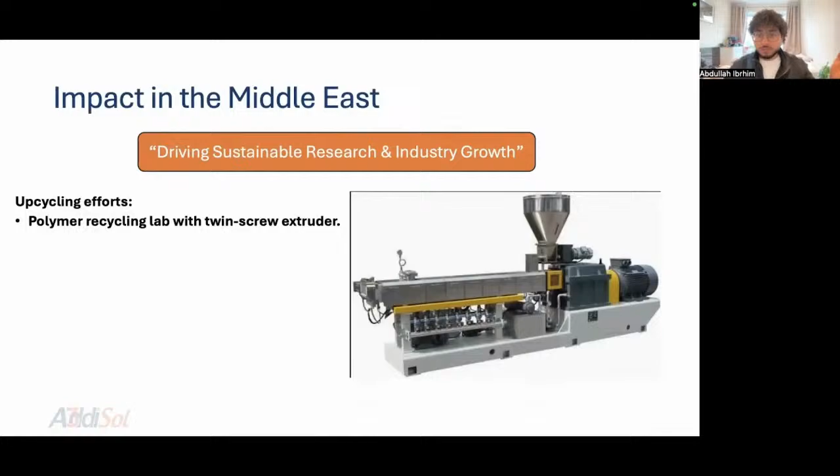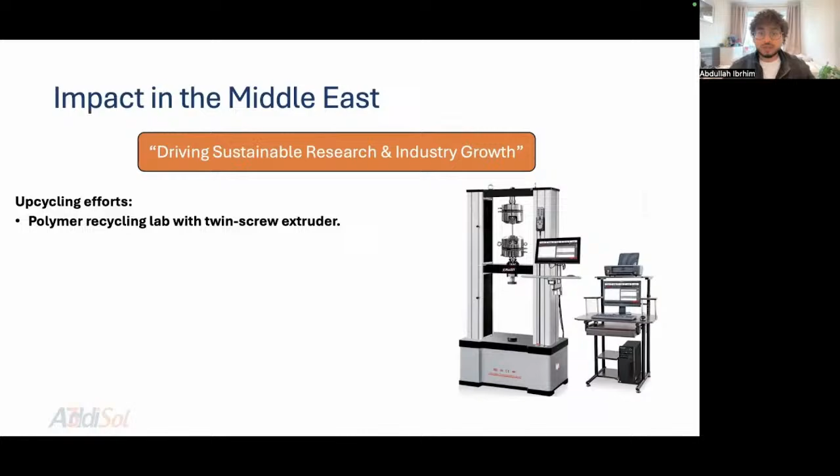This includes providing twin screw extruders that can mix multiple recycled polymers and then convert them into pellets, filament makers that can convert these pellets into usable FDM filament, and also rheological material testing machines that can determine the printability of these recycled filaments. At the same time, we also provide powder atomizers that allow a similar recyclability for metals.

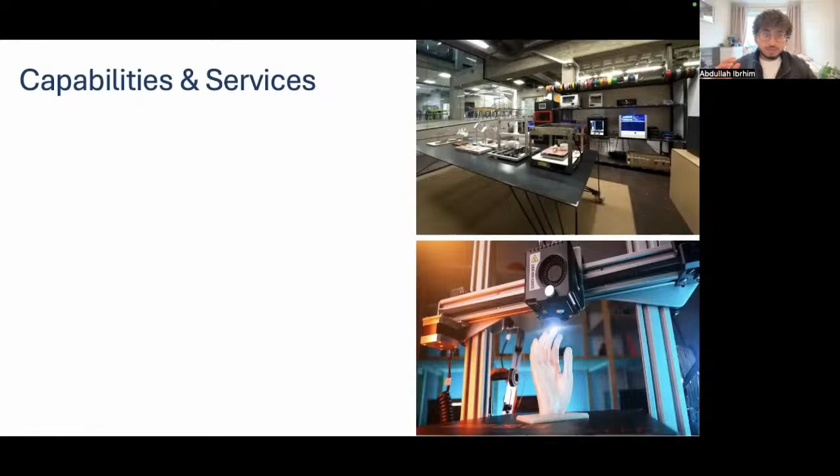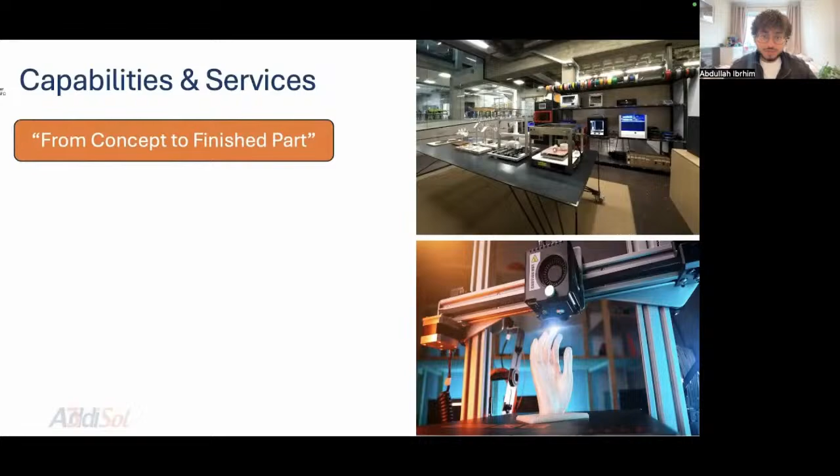So, the capabilities and services available at AddiSol. Our goal has always been to assist our clients from concept all the way to the finished part. Our core capabilities include 3D printing solutions such as SLM, binder jetting, polymer extrusion, composites, CFC technology, as well as direct energy deposition. Material testing equipment such as universal testing machines, dynamic mechanic analyzers, hardness testers, fatigue testing machines, all the works. We also provide geotechnical testing machines like triaxial, consolidation, and soil mechanic equipment.

As I mentioned before, we also offer contract services such as on-demand 3D printing, whether small or large-scale assemblies, as well as finishing, mechanical testing for client projects. Basically, our team of design engineers is proficient in reverse engineering parts for metal 3D printing, as well as designing bespoke solutions for our clients. We cover the full workflow, from design and simulation to printing, post-processing, including finishing and painting, all the way to quality testing to ensure that parts are ready for critical applications.

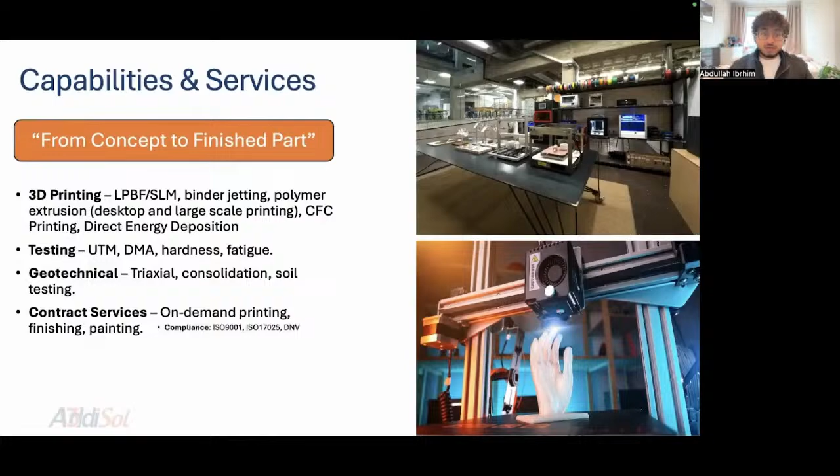Finally, we also help our clients adhere to compliance certifications. For example, recently we helped one service center get a DNV certification. Now, as I mentioned before, we are expert in turnkey solutions and handling complex projects. We take pride in turning ideas into tangible products.

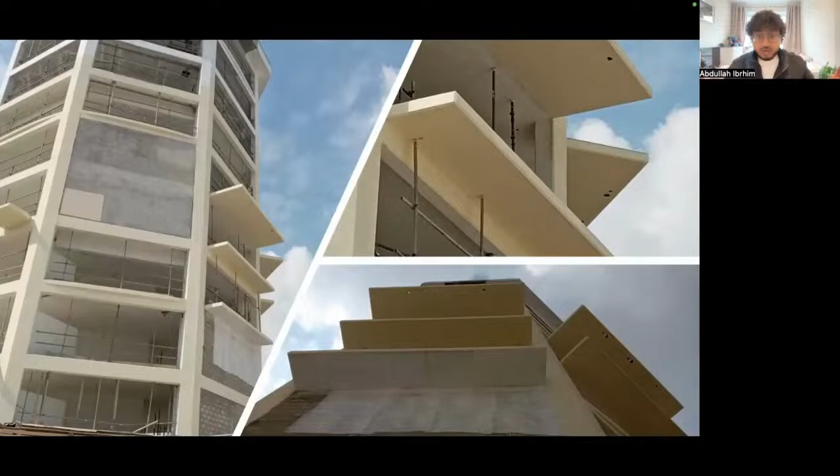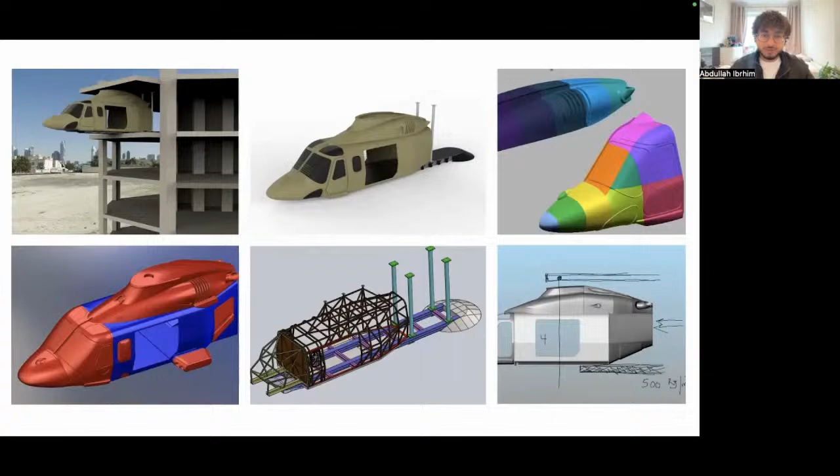And thus, after designing, began the printing process. Using our largest 3D printer from Sweden, we began printing the nose as well as the body of the helicopter.

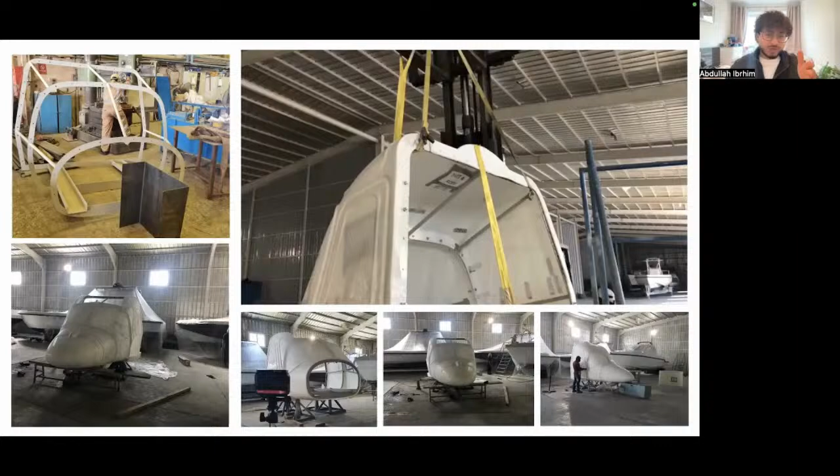And then here, you can see the fabricated support structure or the frame, all of which was fabricated in our facilities in Qatar by our own team of engineers. Zero outsourcing. And this video is also going to give you an idea of the size of this project and showcase how our team dealt with the difficult task of managing so heavy an assembly.

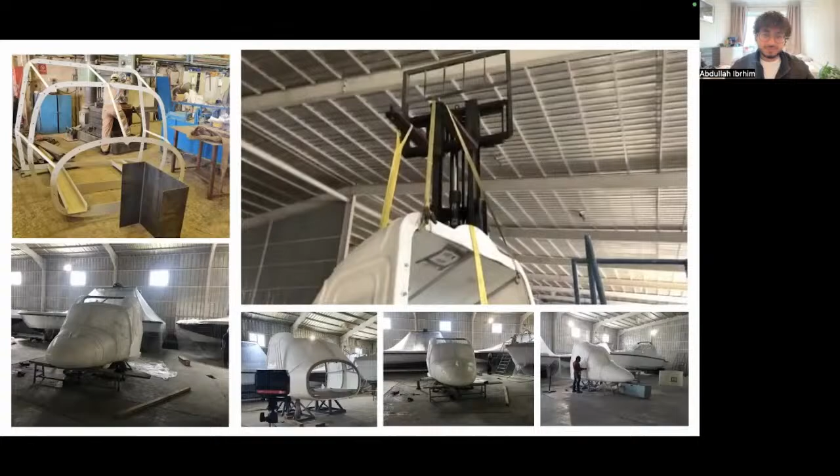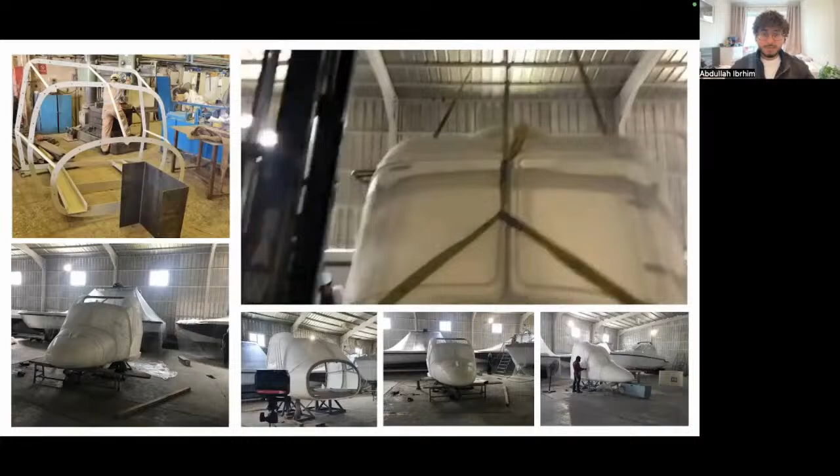And the frame was also assembled with a safety hatch integrated into it. You can also see the initial phases of painting and finishing in this video.

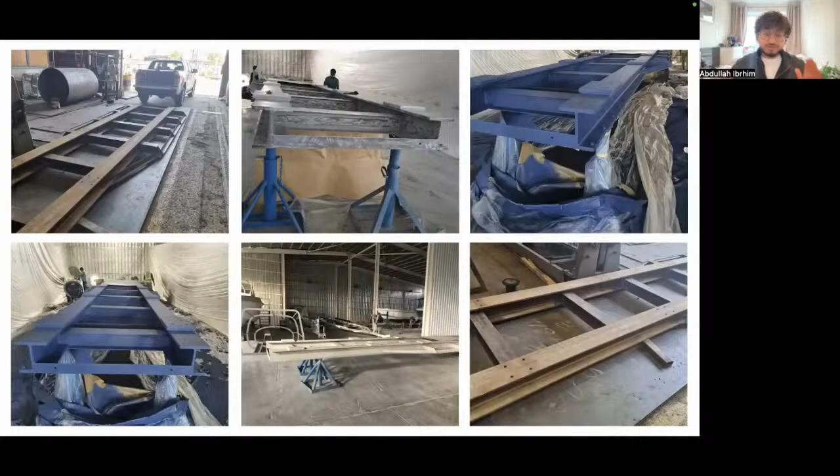And then this is the beam structure that would have held the entire assembly and frame together with the concrete slab. Again, fabricated in our facility by our own engineers. Some more finishing, specifically of the backside of the helicopter's body, where the engine exhaust can also be seen.

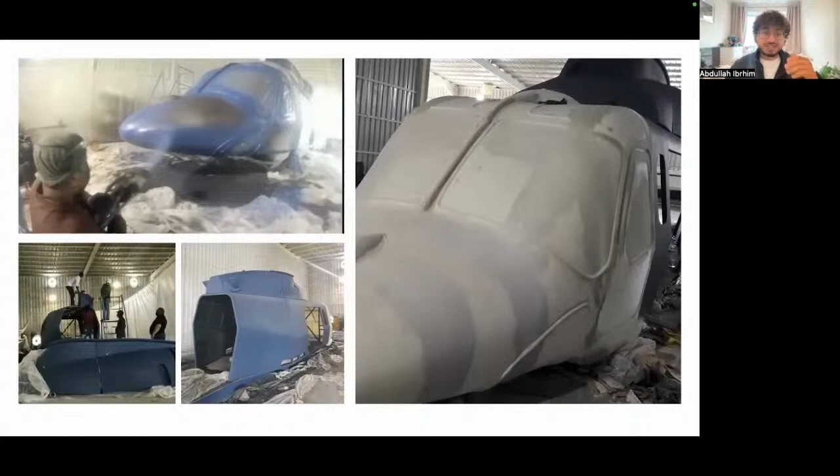And bit by bit, you can see the assembly coming together. This is the front side, the nose of the helicopter. And thus began the installation process.

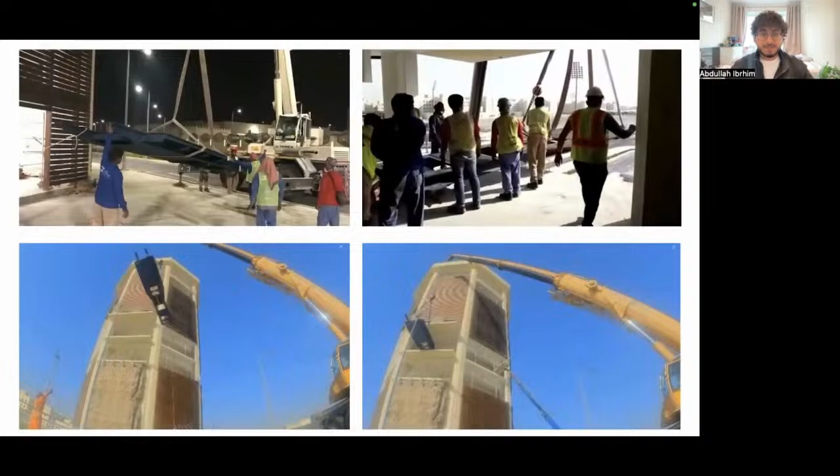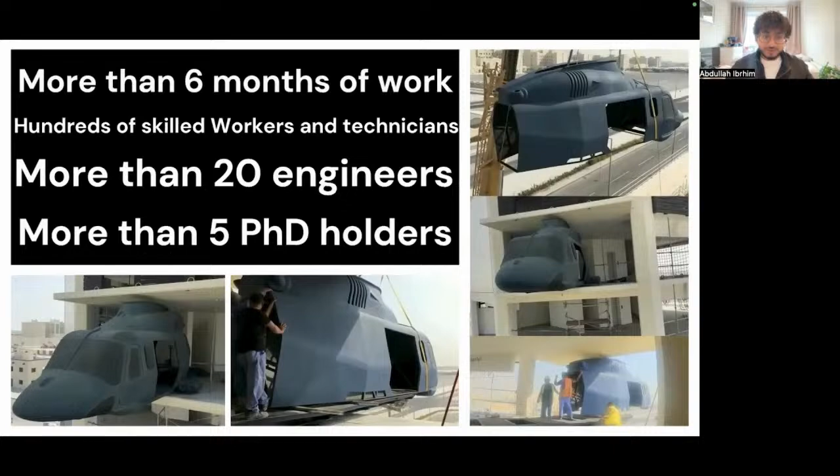This project was a task and a half, but after 6 months with a team of around 20 engineers, 5 PhD holders, and hundreds of skilled workers and technicians, all of them a part of Addisol's teams, we were able to deliver the final result. And this is just one of our most recent ventures in the Middle East.

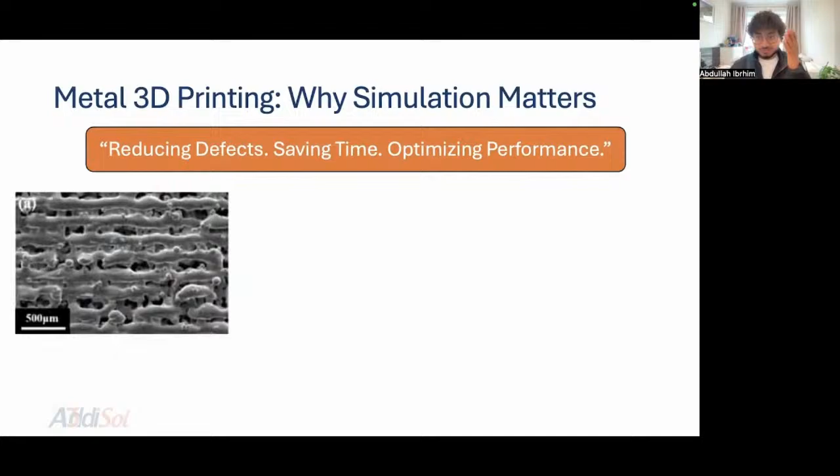When it comes to defects, the 3D printing process of metals is a process riddled with them. The process involves complex physical phenomena occurring across multiple time and length scales. The types of defects include porosity, which can create weak spots and eventually cause cracks. And then these cracks are also closely related to residual stresses and incomplete fusion.

Another common type of defect is the balling phenomenon, where liquid metal solidifies into spheres under the action of surface tension, and this eventually leads to a negative impact on the powder quality of the next layer. These are just some of the process defects that the metal AM process involves.

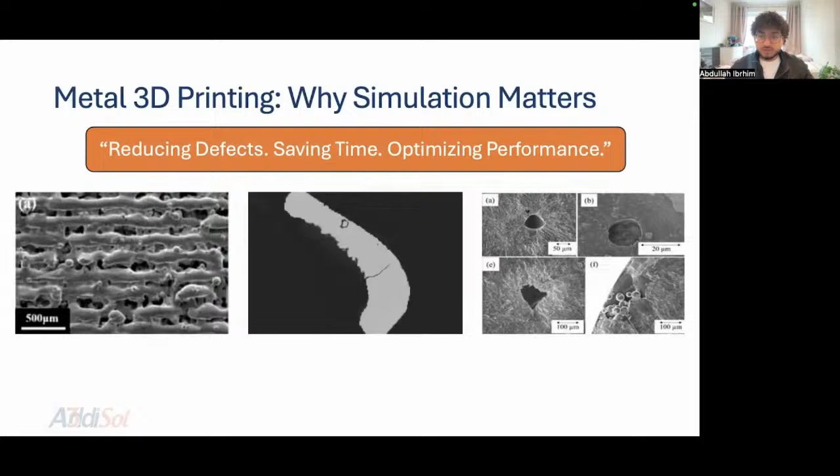Avoiding such catastrophic defects, though, is essential for team leaders, especially when it comes to the ideology of first time right. Every hour on the machine and every kilo of powder is cash, pure cash. Simulation lets us test ideas on a screen first, so we avoid failed builds and we accelerate approvals.

The outcome that we are after is simple: first time right, more often, and a faster path from concept to qualified part. This stands out even more when we consider a process like metal AM, where raw material and process costs can build up rapidly. Repeated work is a liability and it can absolutely ruin workflows.

Now, what do team leaders care about? So, how do we de-risk new parts and materials? How do we shorten time to market? And how do we standardize process knowledge across teams? These are the questions that we hear the most often from R&D, production teams, and quality assurance teams.

The right simulation approach tackles all three of these: de-risking, speed, and institutionalization of the best practice. And the answer to all these questions lies in selecting the right simulation tool.

Typically, metal AM simulation models work at multiple scales: the micro, the meso, and the macro. For the macro scale simulation, the FEM approach has been widely used by many models. At the meso scale, CFD, SPH, and lattice-Boltzmann methods are used to analyze fluid flow in the melt pool. And at the micro scale, phase field and Monte Carlo models are used to analyze grains, nucleation, and voids.

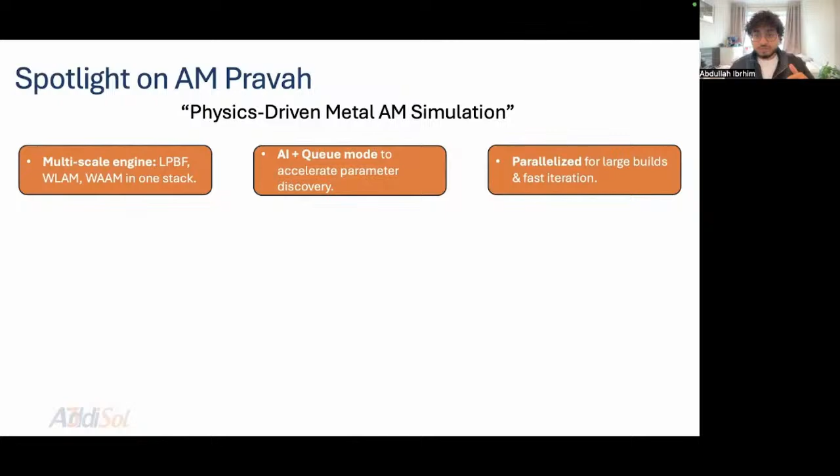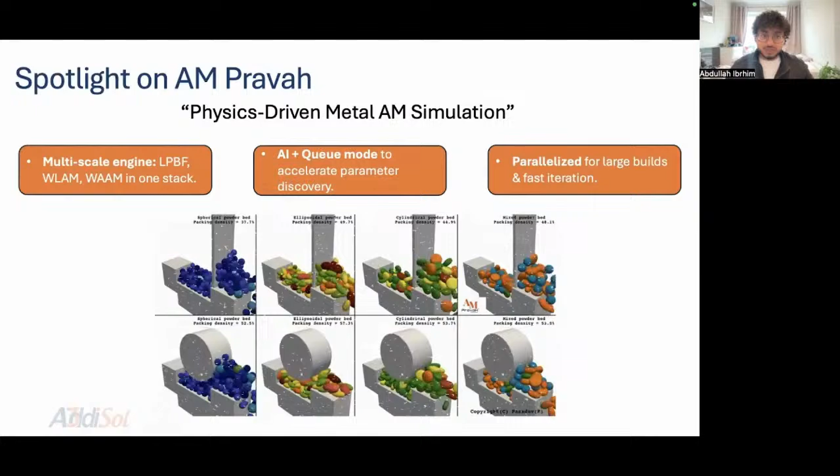So, just summarizing, what is AM PravaH? And what does it do? AM PravaH covers the processes that most teams run: LPBF, along with wire-based DED.

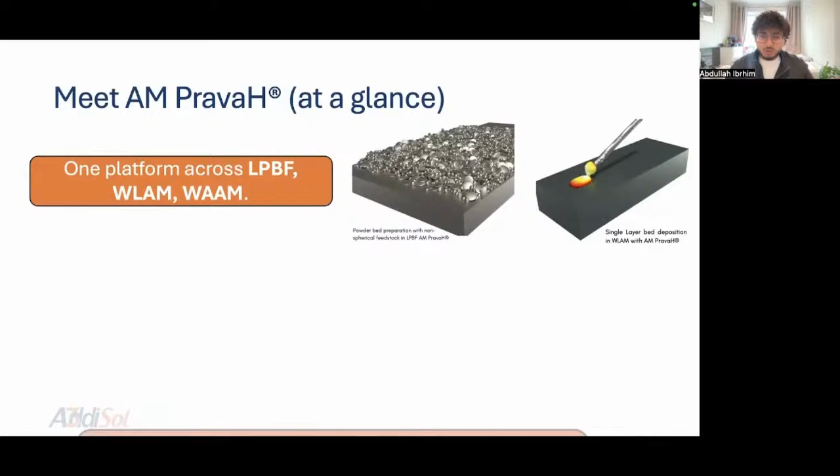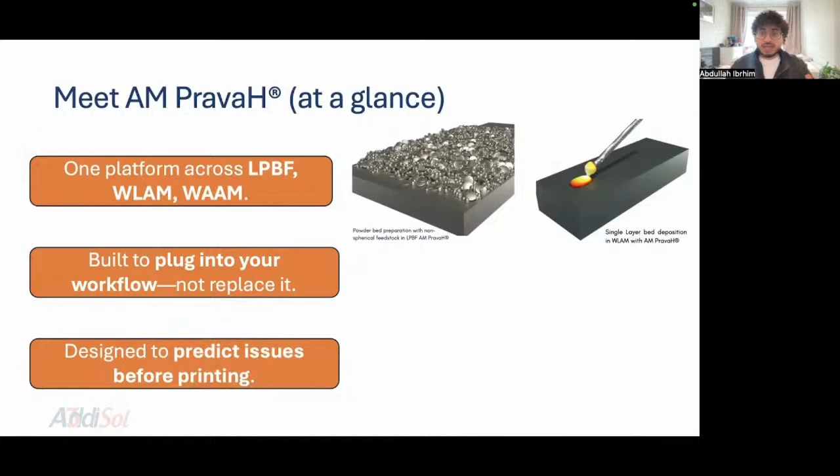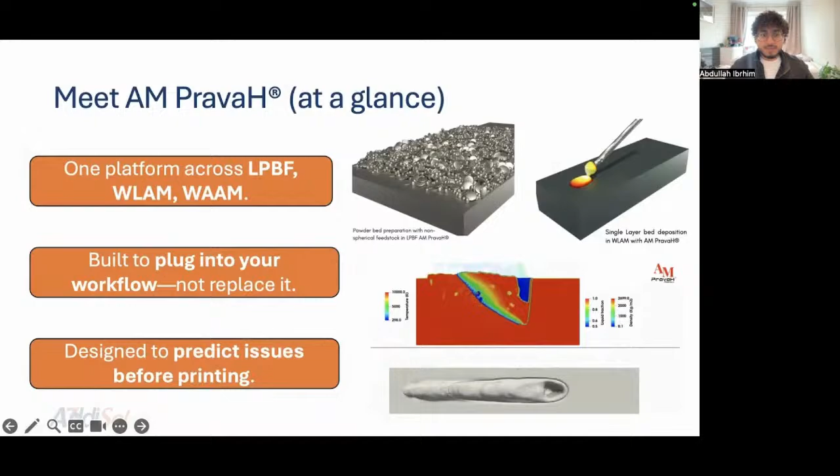Now, where does this pay off? Well, less rework means fewer wasted resources, as well as fewer surprises for planning and sales. It also gives production teams clear and better documented recipes so that programs can scale smoothly, allowing cleaner handoff from R&D to production. You can integrate AM PravaH into your existing CAD and CAM machines, and using its physics engine, you can run quick what-ifs before even scheduling a single build.

Using the power of simulation with AM PravaH, you can determine the best recipes or parameters, and then take away lessons that can be used by AM PravaH's AI-powered Queue mode to give you the best parameter combinations for any given scenario.

So don't just predict the outcome, design the process that creates it. AM PravaH's process-aware simulations can show you how your choices can cause defects, and then you can decide how to overcome them. Many simulation tools can report outcomes, but AM PravaH stands out by helping you design the process that creates these outcomes. You'll see that in the demo and how changing settings shifts risks before you even waste any precious resources.

So, really quick, what do LPBF teams get? Well, for LPBF, AM PravaH gives us confidence on the core knobs: laser power, scan speed, hatch, layer thickness, and beam shape.

And it does this by showing how they drive the melt pool specifically, as you can see in the visual on the right. In practice, we are always looking for a stable melt pool footprint, which involves its depth and its width. And we want this melt pool to fully fuse tracks without forming a deep keyhole.

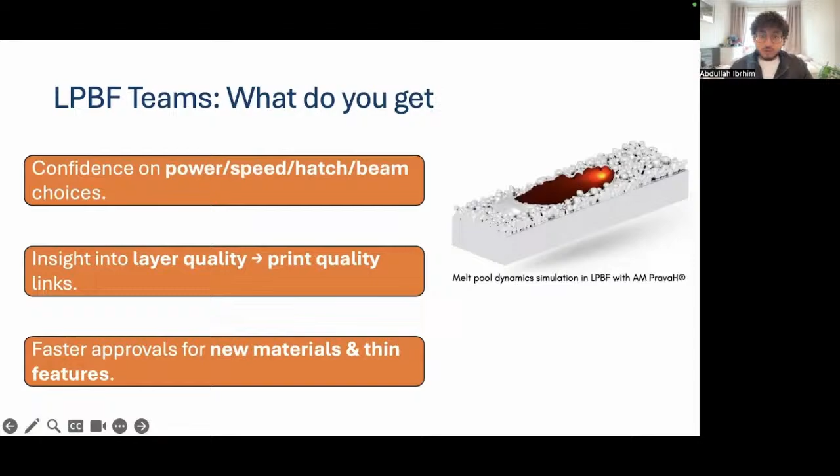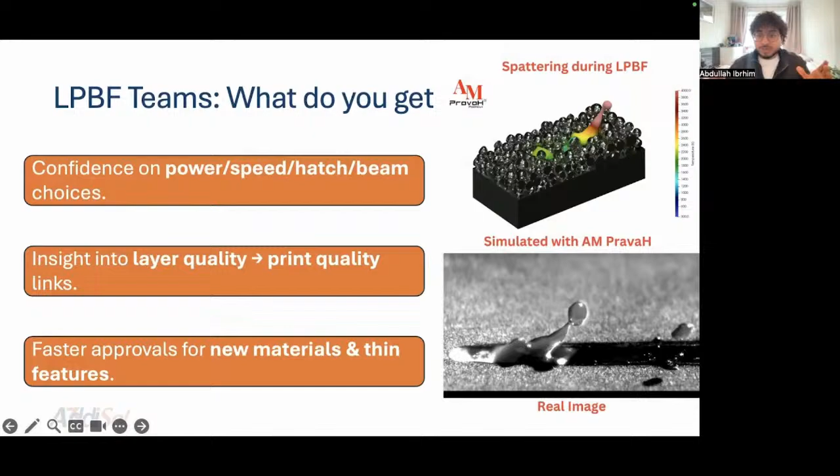And because the powder quality is modeled, including non-spherical particles and packing, you can see how rough or sparse layers increase the risk before the laser ever moves. On top of that, we can also test different beam profile shapes to widen or stabilize the melt pool on sensitive geometries, and run multi-layer, multi-track windows to check if a recipe can stay healthy as heat accumulates.

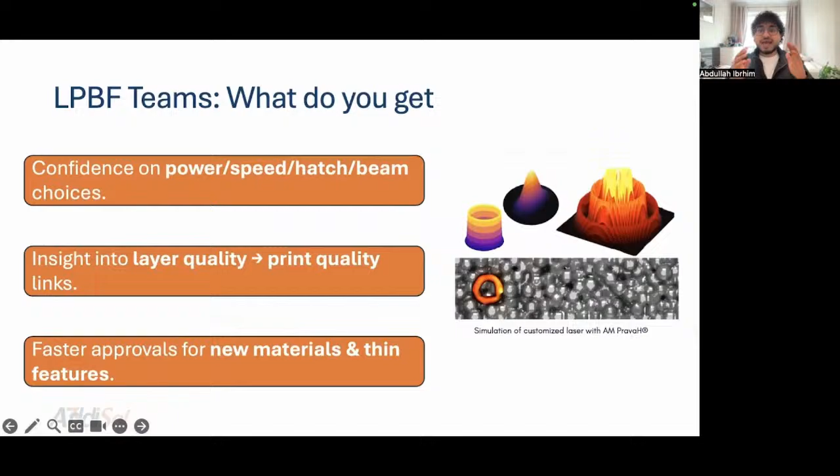The net result of all of this technicality is faster approvals for thin walls and new alloys, fewer scrap builds, and a much cleaner sign-off from R&D to production.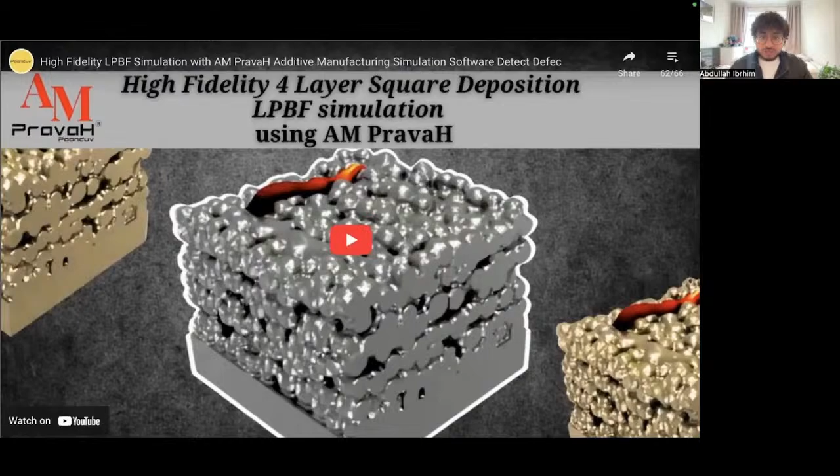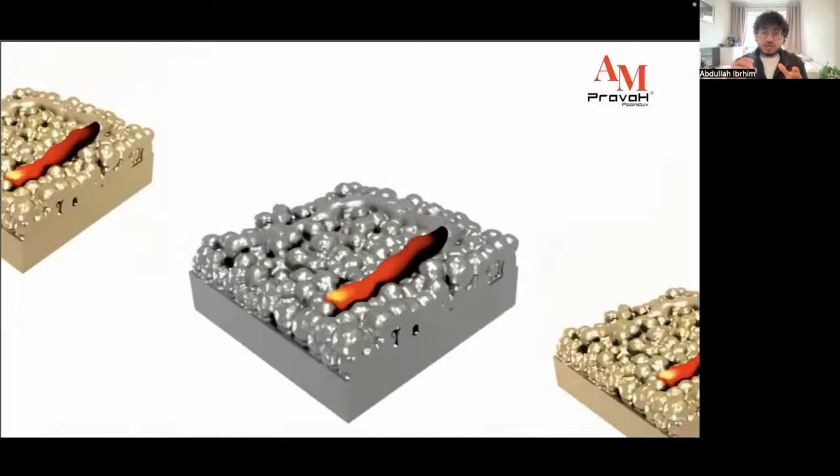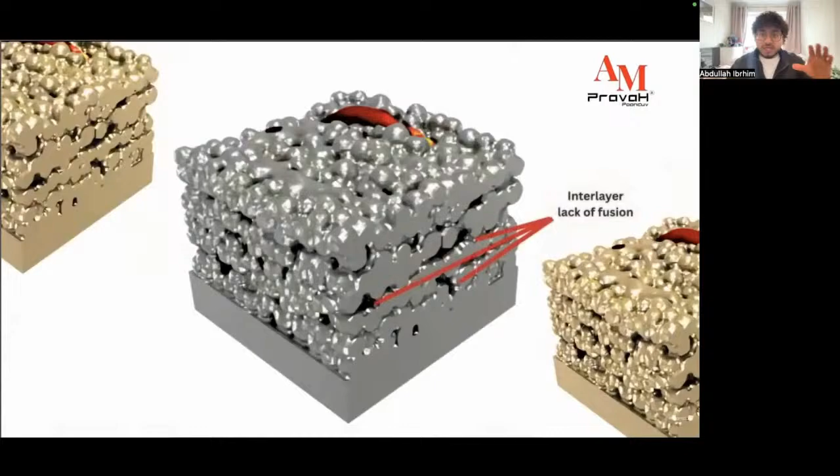You'll notice that within the simulation, the software captures an interlayer lack of fusion, and the simulation identifies these defects caused by low laser power or high scan speeds, could be either, and then offers crucial insights into process optimization. Now, after the third layer, you'll also notice stable patterns. By the third layer, stable deposition patterns are observed, indicating consistent layer buildup and enhanced process stability.

Now, what about wire DED? What do you get for your team? Well, on the right, you see WLAM, wire feeding into a laser-made melt pool. The top image is a simulation view from AM PravaH, and below it is the high-speed camera from a lab run. The point is simple: what we see on screen mirrors what happens on the cell.

And why does that matter? Well, first, it gives us predictable bead stacks on real geometries. We can preview bead height, width, and overlap along walls, corners, and curves, and thus the stack builds evenly instead of wandering.

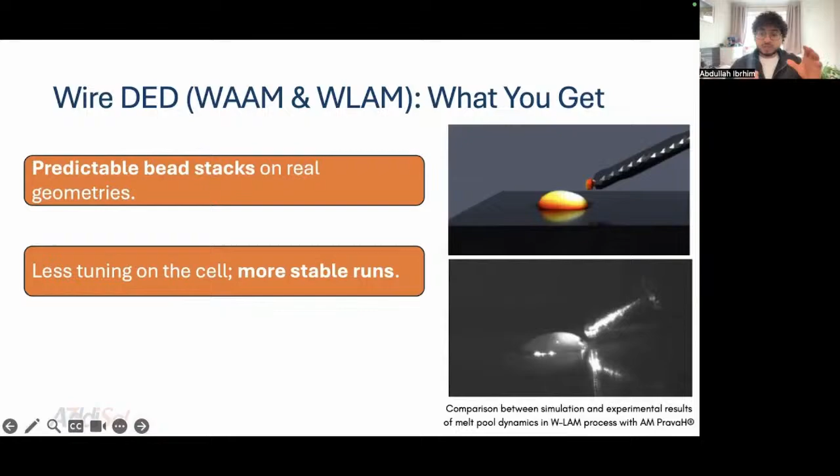Second, less tuning on the cell, basically more stable runs. Before we book time, we try a few recipes, laser power, speed, spot size, wire feed, and the angle, and then we pick the ones that keep the pool smooth and make sure the wire joins cleanly.

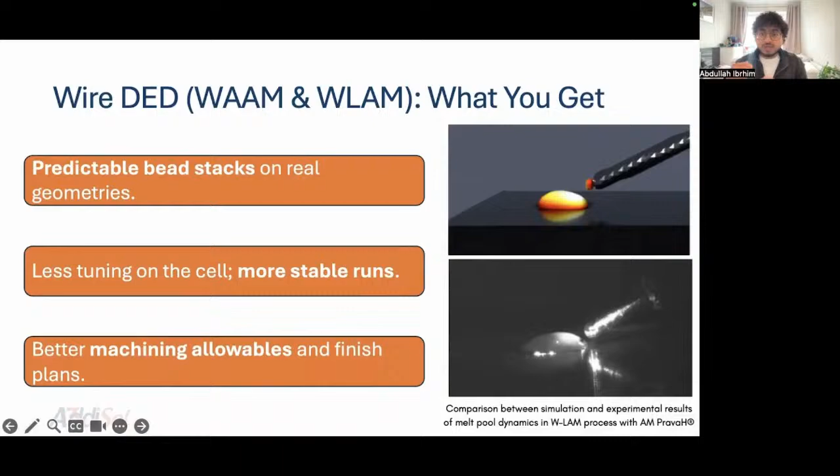That takes the stop and start guesswork out of your setup and shortens the bring up on the robot. And finally, the outcome you care about downstream: better machining allowables and better finishing plans. When bead height and width are consistent, your programmers can hold a tighter allowance, tool paths are cleaner, and you don't have to chase surprises after roughing.

Now, where does Addisol come into all of this? So you're not just buying a black box, you're going to be getting a rollout. Addisol is going to be your partner.

It's going to handle onboarding and training, tailored to your machines, your materials, and your QA requirements. We map PravaH's outputs to your qualification artifacts, for example, defect risk maps, track parameter windows, and microstructure indicators that can support internal reviews.

If you need it, we can wrap this with on-demand printing and mechanical testing: tensile, hardness, fatigue. So you have a single partner, basically, from simulation all the way through verification. The goal is to shorten your learning curve and lock a repeatable way of working that your team can own.

So to keep this session focused on customers and outcomes, we are going to hand over to the AM PravaH team for a live demo. You will see the LPBF view of melt pool dynamics and the defect indicators we mentioned, plus wire DED bead predictions and how parameter sweeps find a stable window. As you watch, think about one upcoming part or one material that you'd like to de-risk. Then we're going to use the Q&A session right after to shape a quick pilot around it, including licensing and support options. Thank you very much, and over to the AM PravaH team.

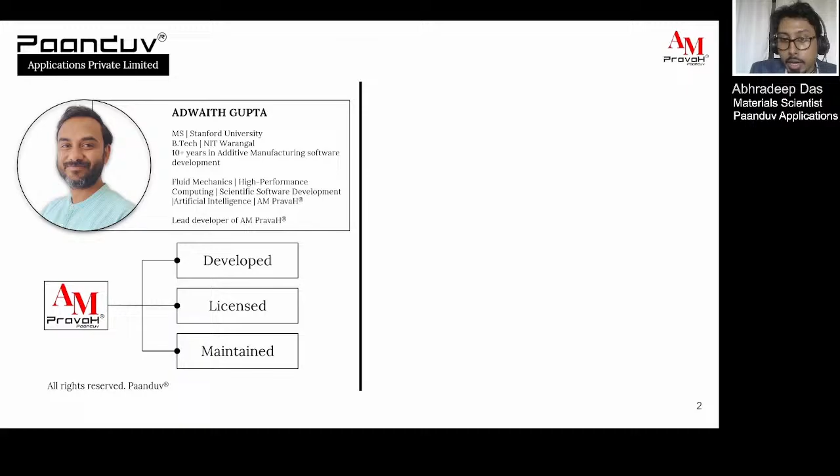We will be simulating the processes across different length scales. Starting with an introduction about us: this software is a brainchild of Mr. Adwaith Gupta, who has been the lead developer of AM PravaH. At Paanduv Applications, we are based in India, and we deal with computational scientific solutions provided for multiple problems dependent on CFD and different aspects.

In the context of AM PravaH, I would like to highlight the different length scales operable across the entire workflow. Starting with the micron to Angstrom length scale, we can see that the scale where we are operating relies somewhere between micron scale to beyond millimeter scale. Our simulation software solutions are delivered across these different length scales, starting from the micron scale to beyond millimeter scale.

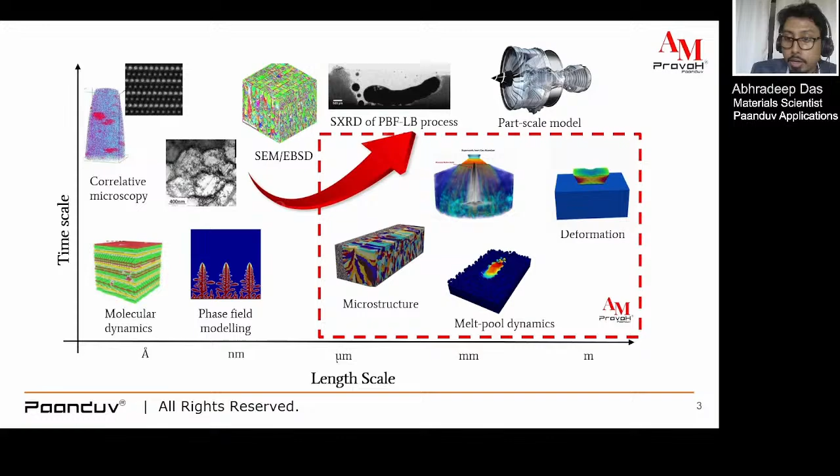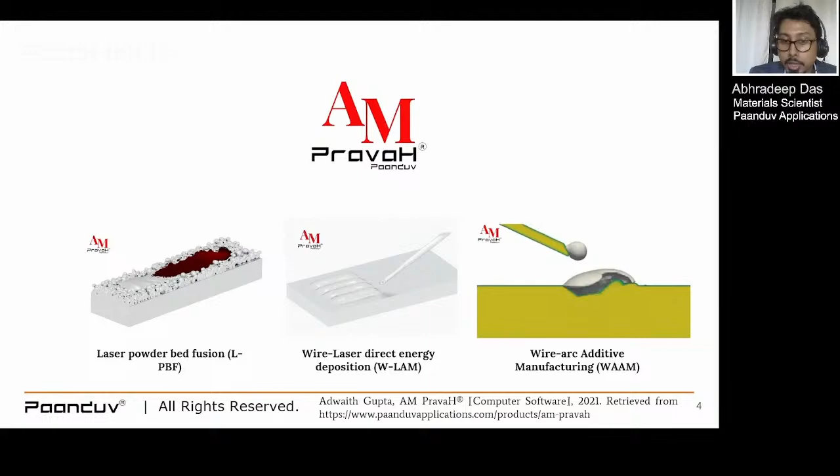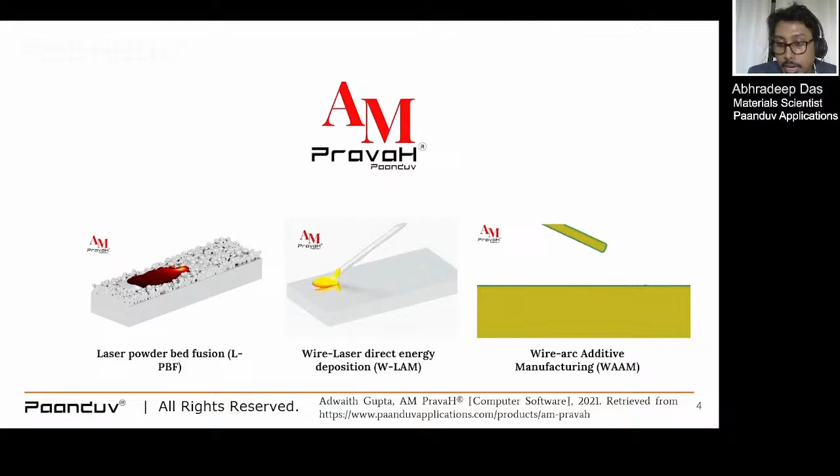So with AM PravaH, we tend to work on three fundamental additive manufacturing processes: laser powder bed fusion and wire-based direct energy deposition techniques, which includes wire laser DED and wire arc DED processes.

Starting with some of the validations of the particular software, what we have observed and reached so far is that we have validated the synchrotron X-ray images to understand the subtle physics of this particular problem. With our simulation tools, without even performing experimental tools, we can have an idea about how this particular process, governed by complex phenomena, is actually operating.

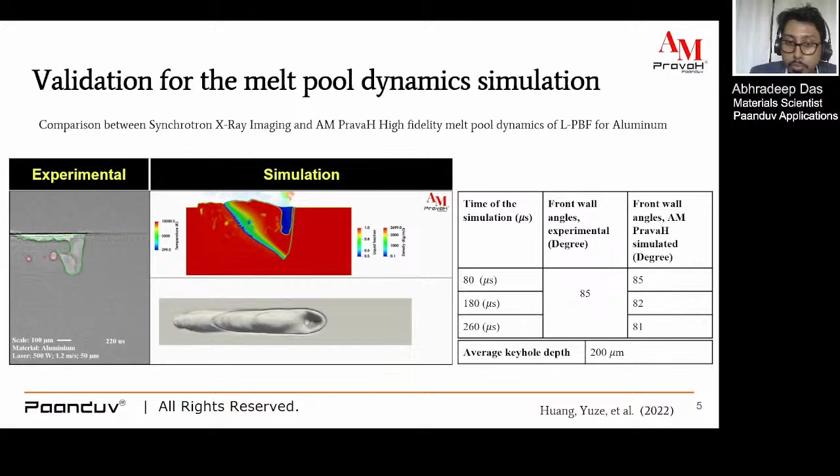You can clearly see from these results how accurately the particular phenomena is captured, considering the different manifolds of this particular process, which includes the defect formations and tending to different melt pool profiles. That's what we are doing for the melt pool dynamic simulations.

Some other subtle features that we would be solving in our multi-phase multi-physics software solutions include the laser, changing the different laser beam profiles so that we can have different thermal histories and generate different sorts of material properties. That's what we tend to do with the laser powder interactions, capturing complex phenomena like the Marangoni convections, transient heat treatment, and transient temperature profiles that evolve during the entire process.

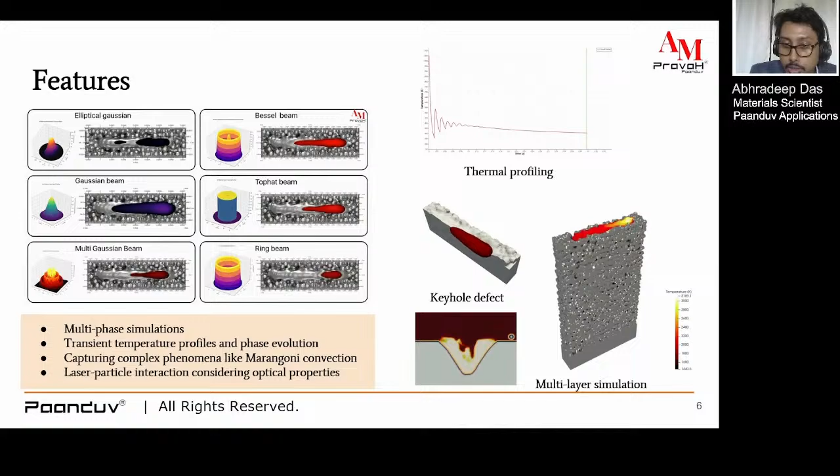With that in aid, I would like to demonstrate certain defects that we have captured quite successfully, involving the deep physics within the formation of these sorts of defects in these innovative processes. We are not restricted to a single layer process; we have extended ourselves to multi-layer processes as well, capturing all the subtleties of the processes itself.

For the microstructure, it is one of our interesting modules. What we have observed is that the process parameters govern the microstructure formation, which eventually leads to the formation of different properties. This is what you can see here, and how exquisitely we have captured those areas which are left over in the experimental. That's how we reduce the reliance on experimental exhaustion for researchers across the globe and for engineers working in this particular field.

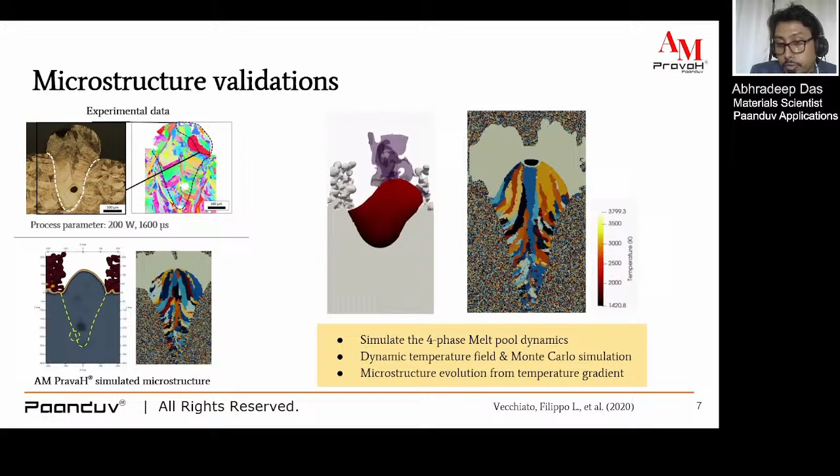We use in parallel the multi-phase problems along with different Monte Carlo based models to model this microstructure solution.

Here is another validation where you can see that we have accurately captured the deviations of the grain sizes as well, wherein we have validated our results against experimental EBSD analysis.

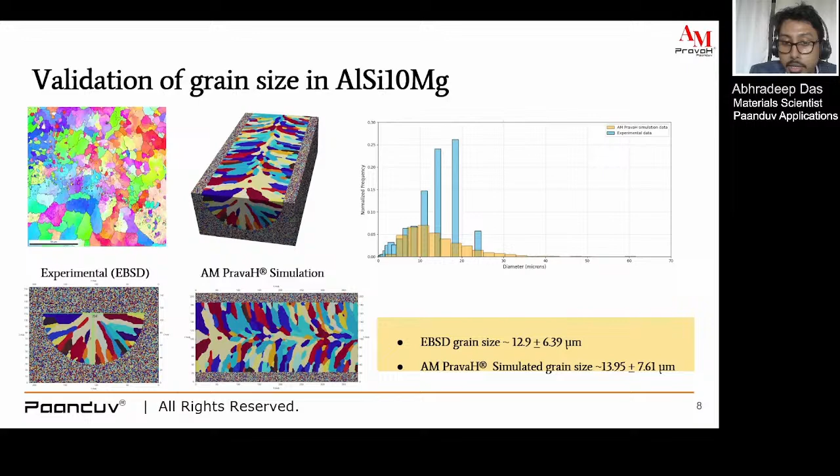We are modeling and simulating two different wire DED based processes: wire laser DED processes and wire arc additive manufacturing processes. These processes include different material deposition modes and cover different defects that are generated in these sorts of processes.

We can also see here the close proximity between the experimental results and the simulation results, and we have obtained a very good fit between these two.

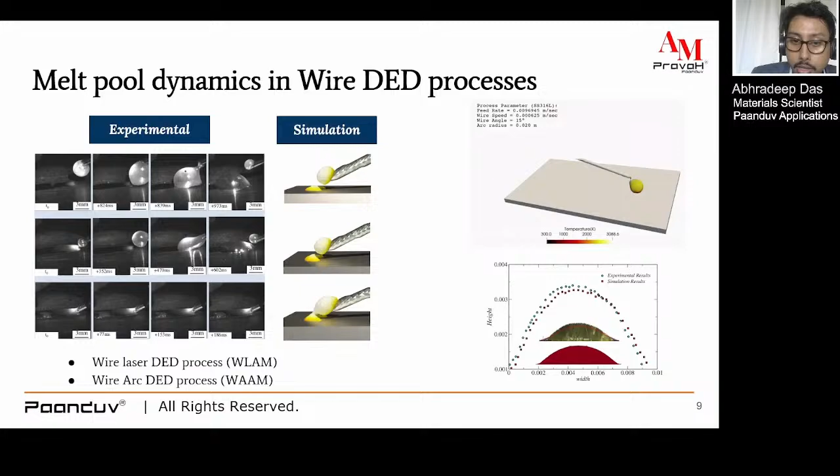In a nutshell, to cover the benefits of AM PravaH, we place ourselves as an end-to-end simulation solution for additive manufacturing processes, ranging from powder preparation to part scale simulations or bulk simulations.

We have seen that using such a physics-informed software, you can cut down the operational cost by about 67%. Typically for different material innovation and part scale qualifications, it can reduce costs further. Also, it reduces the reliance upon the extensive characterizations and experimental trials that engineers and researchers tend to do in building a component.

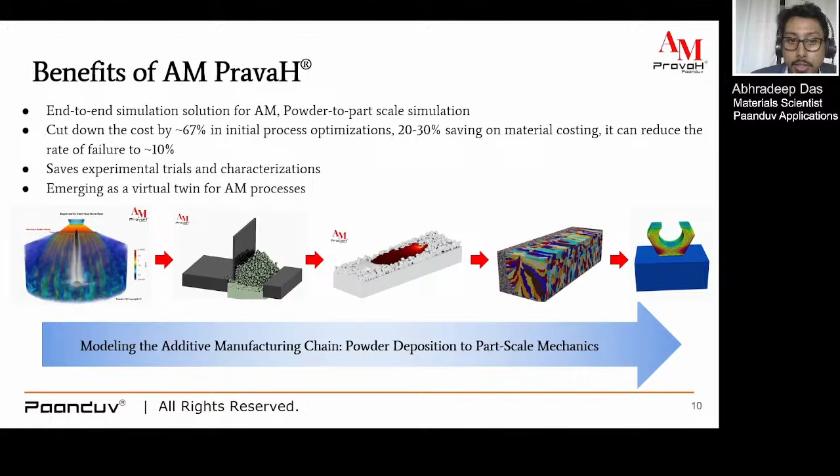We also emerge ourselves as a virtual twin for different additive manufacturing processes, and therefore we place ourselves as a physics-informed simulation tool that can solve different additive manufacturing problems, and it also improves the efficacy of the entire workflow.

So we equip ourselves with a simple GUI, a very user friendly interface, and we also take up different temperature dependent thermophysical properties that enable us to capture subtleties such as different thermodynamic actions at different length scales. Also, we come up with an integrated material database.

We can also customize different other variables such as the shielding gas, the powder distribution, and the scan patterns. We can have different hatches, different strategies that are included in our GUI.

Also, it enables us to vary the process parameters drastically, starting from the laser parameters, the scan parameters, and different other aspects. With the aid of such software, we are also simulating other parameters as well, that is the different computational parameters.

We augment ourselves with AI based models using the database that we generate, aligning with the data available in the literature, and we combine that to further optimize the entire process flows.